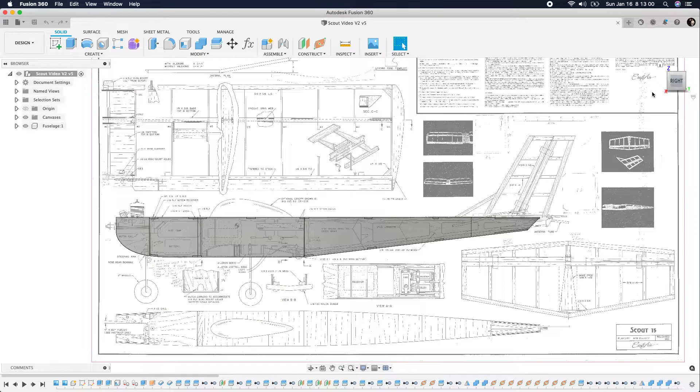I hope everybody is getting through the other stuff okay. Haven't heard too much from people.

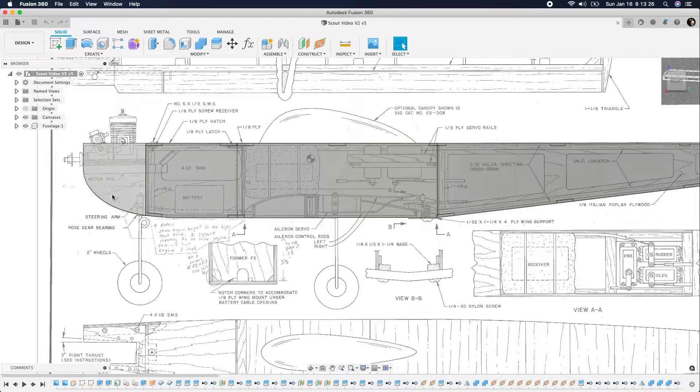But we're going to work on the formers today, and the formers are going to be pretty much like how we did the tops and the bottoms. This airplane has really simple straight up and down formers, which makes it easy. When you design airplanes, especially converting to electric, you might want to make sure you put some down thrust in that firewall. But we're going to just follow the plans here and move on along.

So this works very similar to how we did the tops and bottoms as far as creating the tabs. You don't have to create tabs on these. That's up to you, depending on how you want to build it.

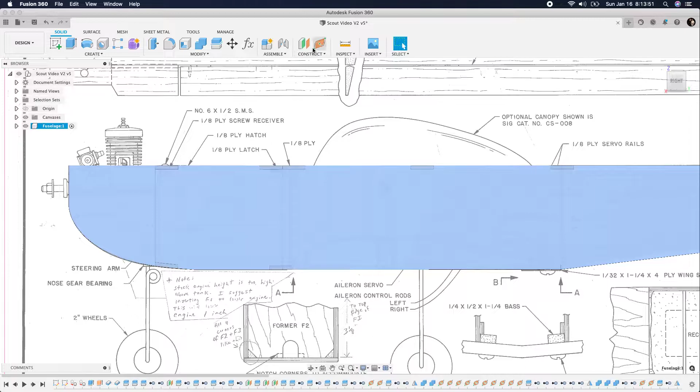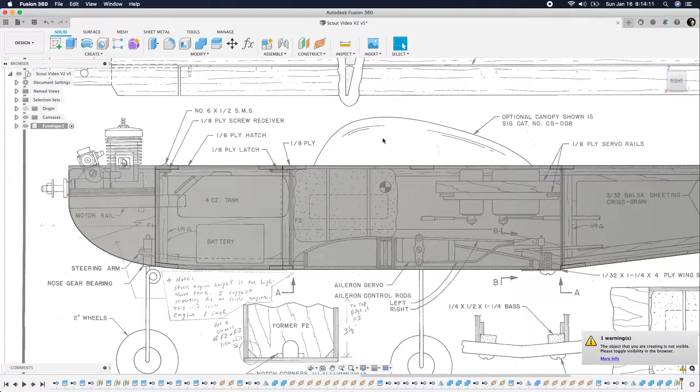So what I'm going to do is make sure I have the fuselage components selected, and I'm going to create offset planes. I'm going to select that plane, and I'm going to move these planes over to where these formers, or bulkheads as they call them in the ship world, start. And just as simple as that, we're going to repeat that offset. We can pull from the same one here.

Actually, I'm going to bring this one back a little bit.

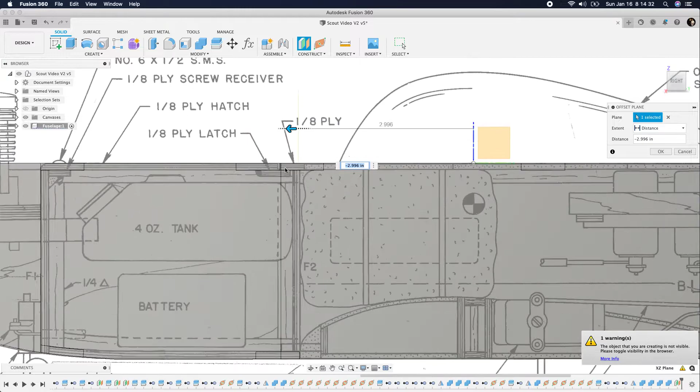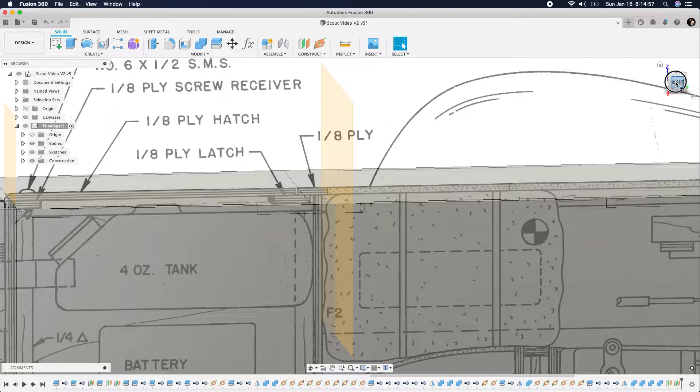Sometimes if you're not able to turn the construction folder on, if you're not able to see where that's lining up, you can make these planes bigger. If you grab an edge, you see where it turns blue. You can also grab a corner and make them bigger that way. It doesn't mean that that's only the area that you can draw in. With the plane, you can draw anywhere.

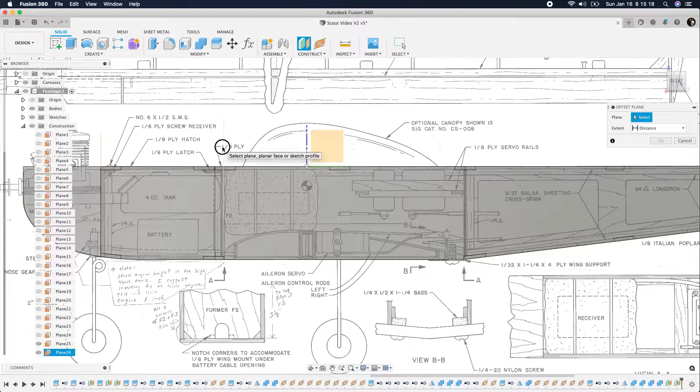I'm going to turn off all these other planes that we created the other day. Don't need them, just need these for the formers. And let's create another offset plane. I'm going to go ahead and pull from this one. It really doesn't matter because they're all running parallel to each other.

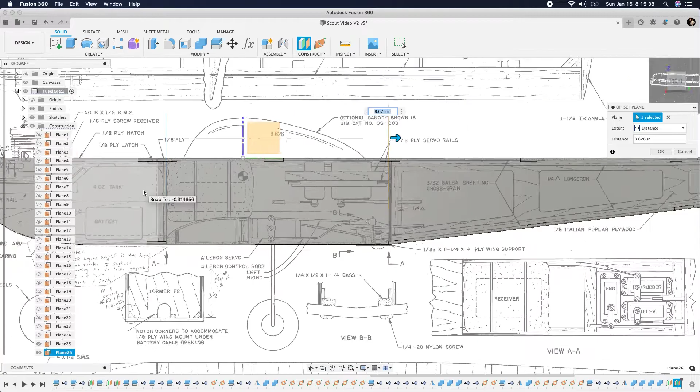And you just got to remember which way that the material is going to go. Like here, I'm going to go back. And on this one, I'm going to go forward with the material when I do this. Now, there are no formers back here, and with this type of construction, it's usually fine, because especially when you do tab lock construction or tab and slot construction, this locks in really nice, and you don't get any movement back there. So this is pretty good.

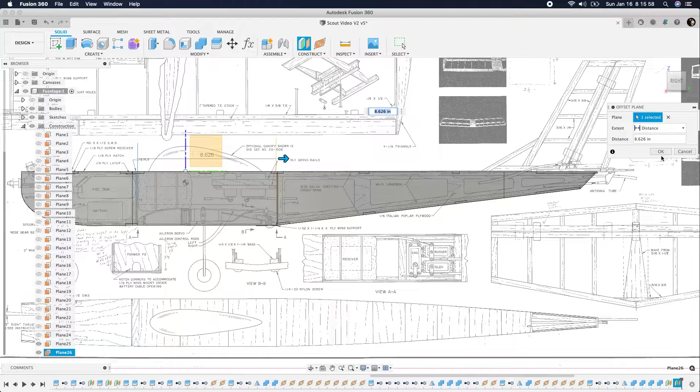We just have 3 formers here. All right, and let's go around here to this first one. Go home. There we go.

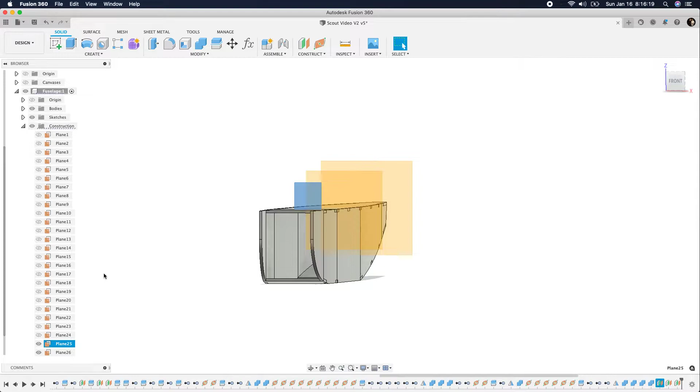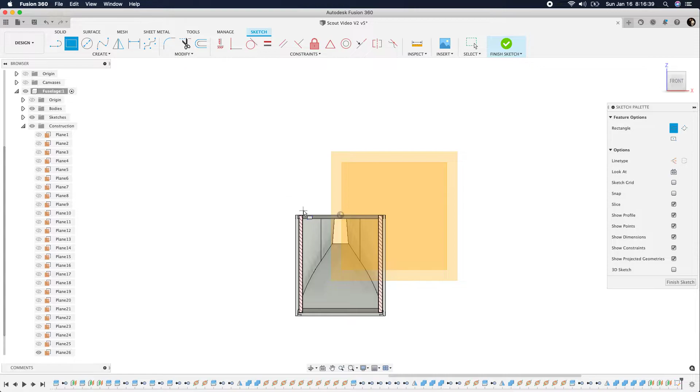I can turn off my canvases now. I don't need them. And I want to create this firewall. I'm going to start a sketch on the firewall. I'm also going to hit slice. And what slice does, slice will cut it where we have that plane. So it's pretty handy to have. And if you're doing tab slot, then all you really need to do is make a rectangle. Wait for my computer to catch up here. Make a rectangle bigger than the area, and we're going to dimension all that so it's fully defined. If you're just making a regular former, you can project all these lines and then just use that for your extrude. So now let's go ahead and define this.

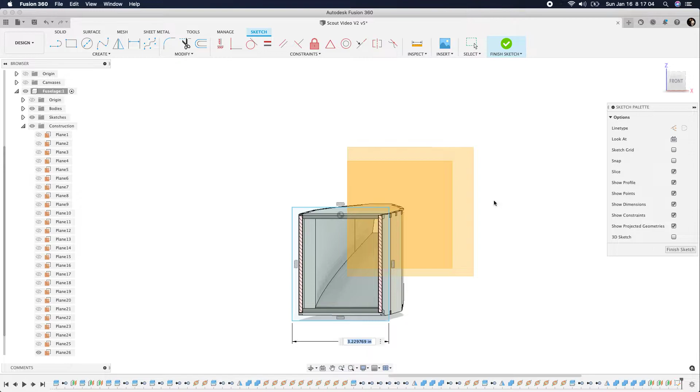Alrighty. I hope everybody that's up in the east is not getting hammered too bad with all that weather.

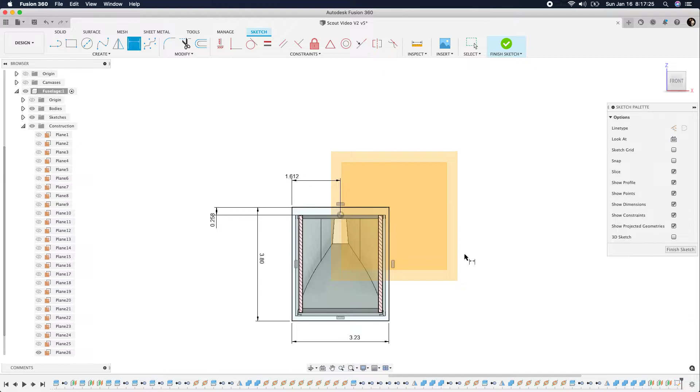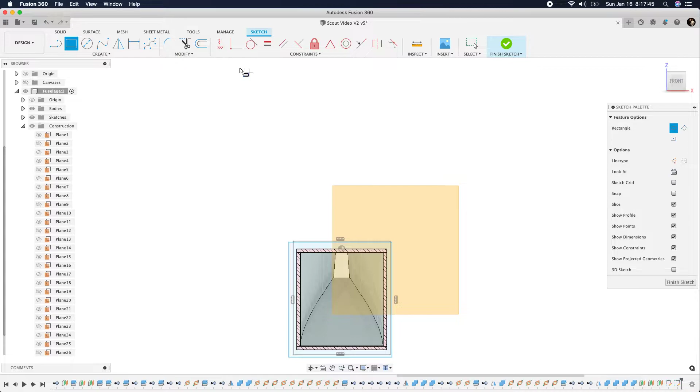Okay, so that one's good. We're going to finish that sketch. Let's go ahead and do the same thing here. I'm going to hit slice. And going to do the same thing. Just draw a rectangle bigger than what that size is right there. And I'm going to define that.

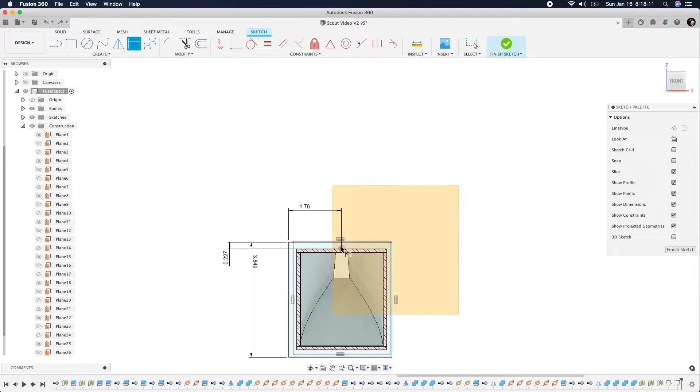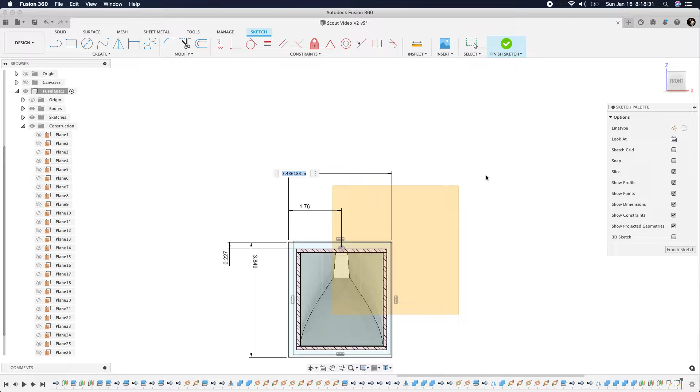Oops. Don't need that. Well, let's just make these parallel. It doesn't like that either. I bet it likes that. There we go. And we're going to do the same thing on this last plane. Slice it and just make a big rectangle. And define it.

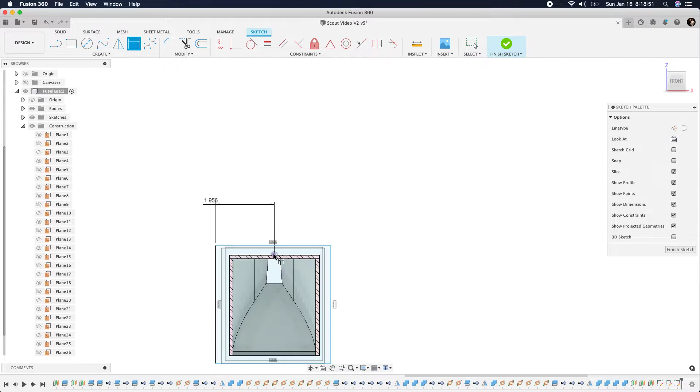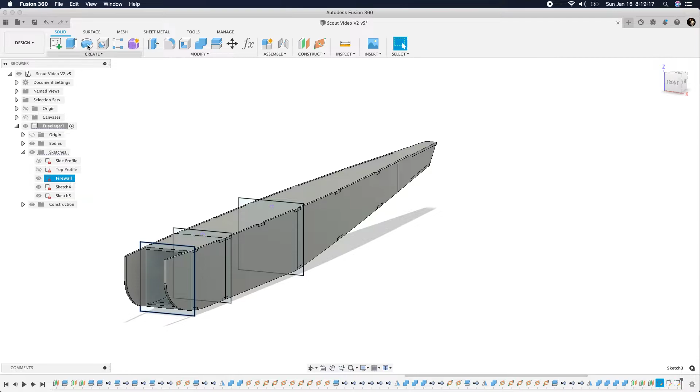And there we have it. Okay, so I'm going to come up on here, and I'm going to call this firewall. It may have another designation. Let's turn on the canvases and see what they're calling them. That's F1, F2, no, that's fine. I'm going to call that firewall, F2 and F3.

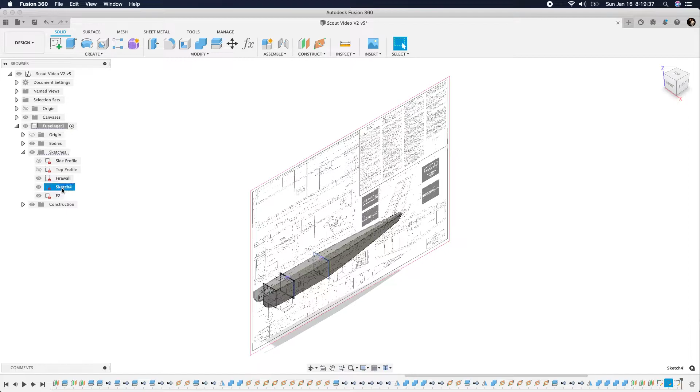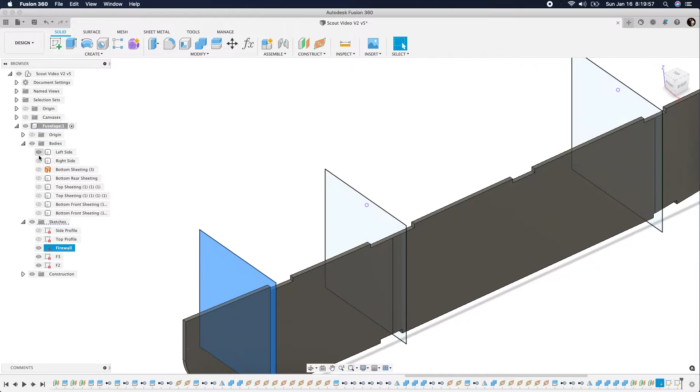There we go. All right, here we're going to extrude this one back. I'm going to go ahead and click that, and I'm going to turn off all these bodies here. Now I'm going to hit extrude, and I guess we'll cut this out of 1/8 inch.

3/16 might be a little better, but if you're electric, 1/8 inch is fine. We're going to call that good. And while we're here, we're going to go ahead and do these others. These will be 1/8 inch light ply.

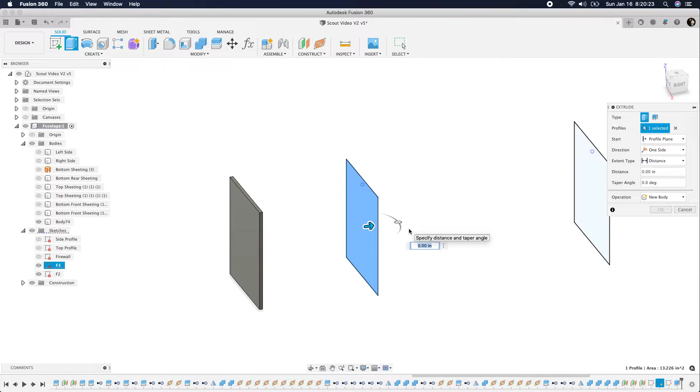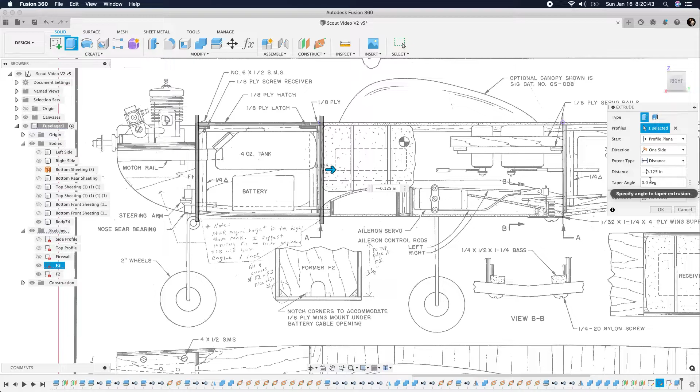And does this one go back or forward? Let's make sure. I think it goes forward. Yes, it goes the other way, so we're going to make this negative. Not double negative, that would be a positive. There we go.

And do this former right here. Now that's the one we want. 125. And there we have it.

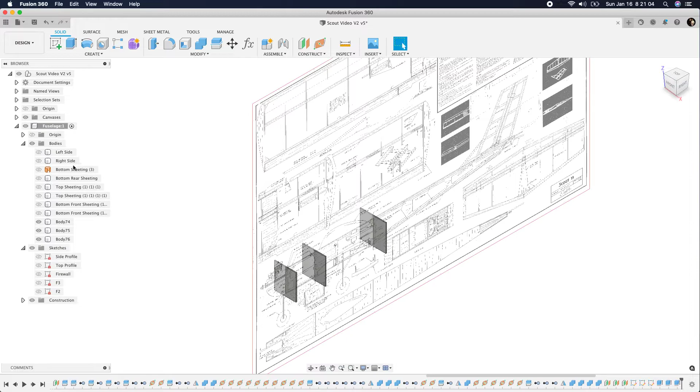Now we don't need the canvases, and we're going to go ahead and turn, let's just turn this top sheeting on. I'm going to rename this to hatch, that's probably more what that's going to be. Okay, and I want to...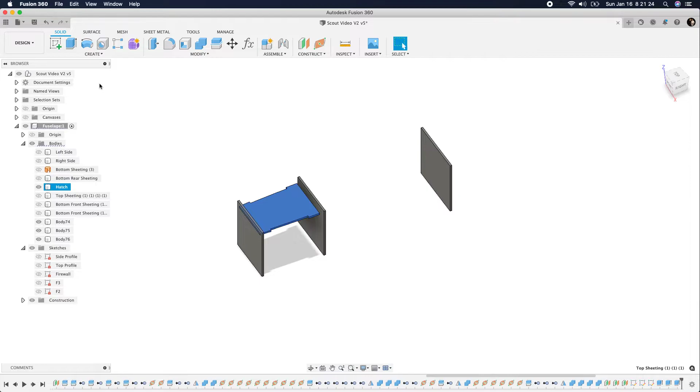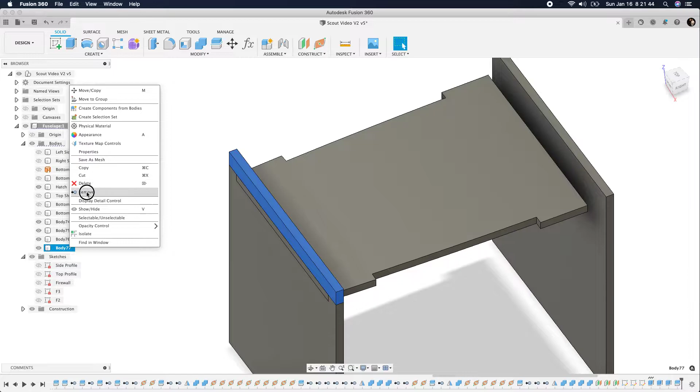Start splitting this up, so I'm going to go to split body. Select this as my target body, and we're going to select just this top surface to cut, and there we have it. This little bit we don't need, so I'm going to remove that, call that good, and then let's turn on the bottom front sheeting.

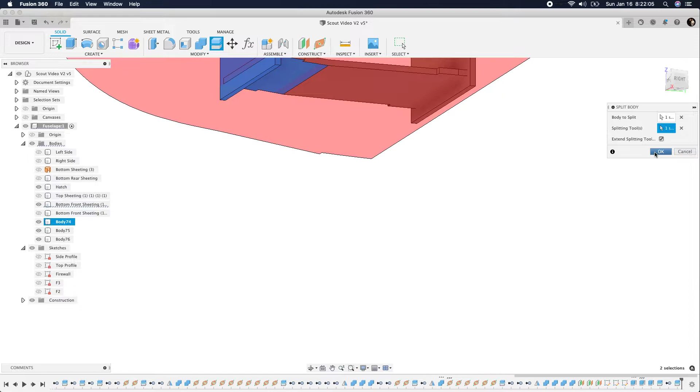There we go. And we're going to do the same thing with that piece. Split body. We want to split this body with this plane and call it good. We want to remove this. Okay.

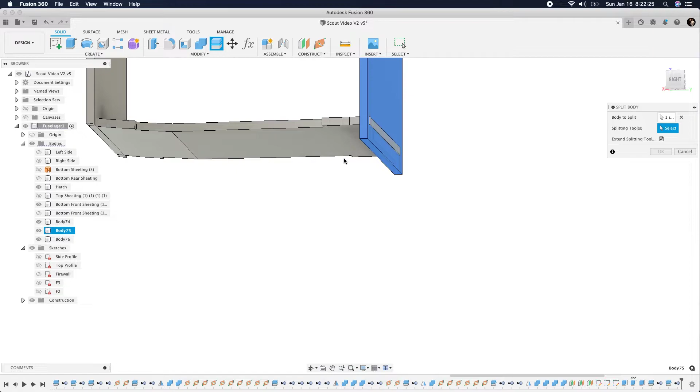And while we have this here, this one actually crosses the bottom of this former, so we'll do the same thing here. We just want that surface, we don't want the whole thing, because you want to make sure and cut through that entire piece.

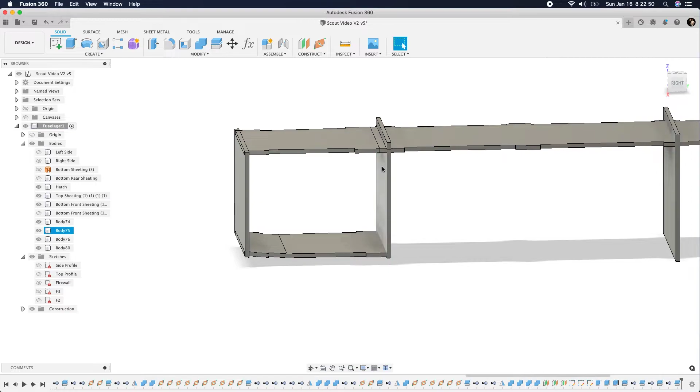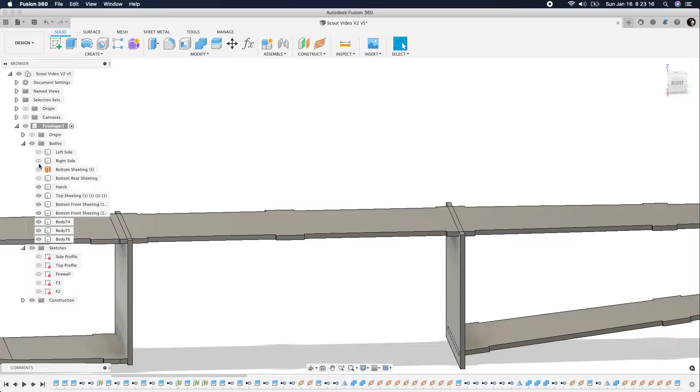All right, there's that. Now let's turn on this sheeting, and we're going to do the same thing here. There's a lot of rinse and repeat. Okay, let's get rid of this. And repeat here. Remove that. Now let's get the bottom of these.

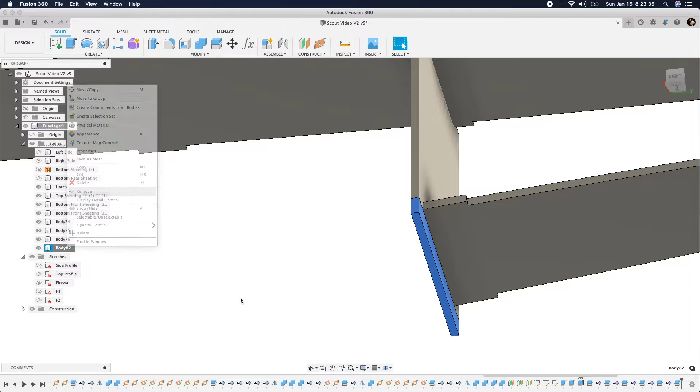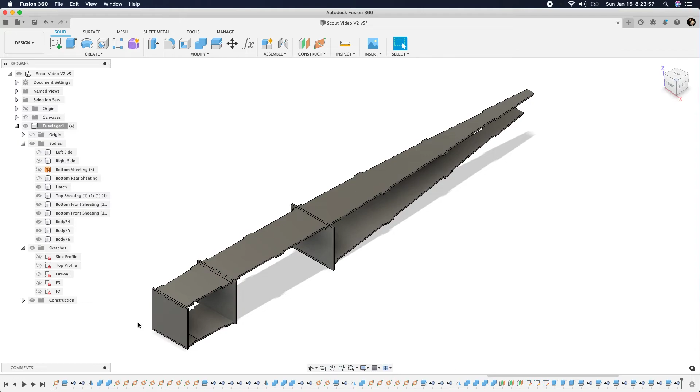So I've been experimenting with this program for a little while, trying to flatten out surfaces like these curved fuselage sides and other curved surfaces. I found a way to do some of that, and I actually ran to the laser cutter yesterday and cut some of that out, and it came out amazingly well. I am very pleased with how Fusion did that.

Okay, now we're going to do the sides the same way. Let me turn these top pieces off and leave those on. We can actually label these as well. Firewall, F2. And this one, F3.

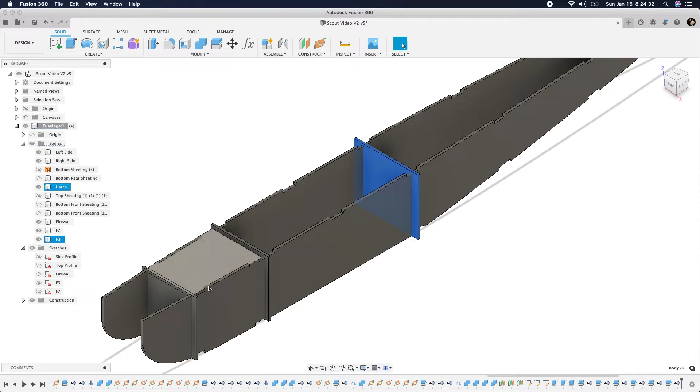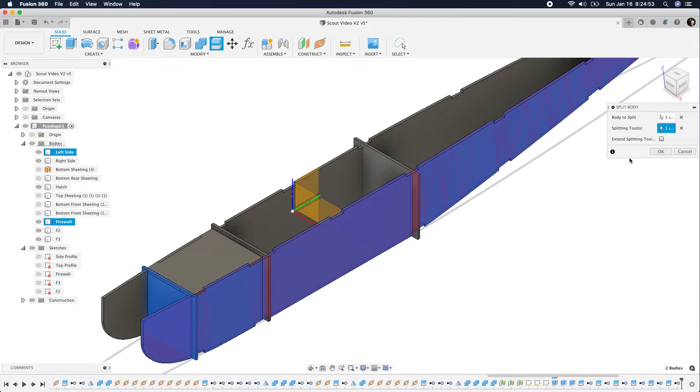Okay, so we're going to do real similar to split body here. I'm going to select it, and then for the splitting tool, I'm going to select. You see how it just selects faces? Well, sometimes if you click on an edge, now the whole thing is highlighted. I want to highlight the whole thing, and I'm going to show you why. So once I do that, now let's turn this side off.

You can see how it split this in several pieces. This is what I don't want. And now, oh, it was connected still somewhere. We'll have to work on that. Maybe that is not what I want. Let's see here.

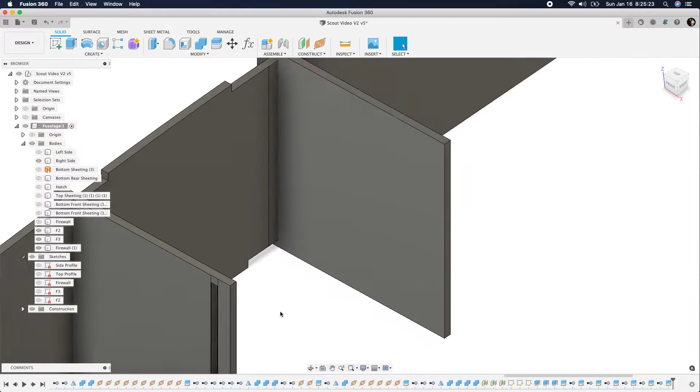Oh, it just cut that little strip out right there. All right, we're going to go back and do that differently. Yeah, split body, okay let's do the faces. Because of that notch where it's hitting, it didn't quite do like I wanted.

We want to split this, and we're going to split it with this face and call that good. All right, let's remove this. That's how we want it.

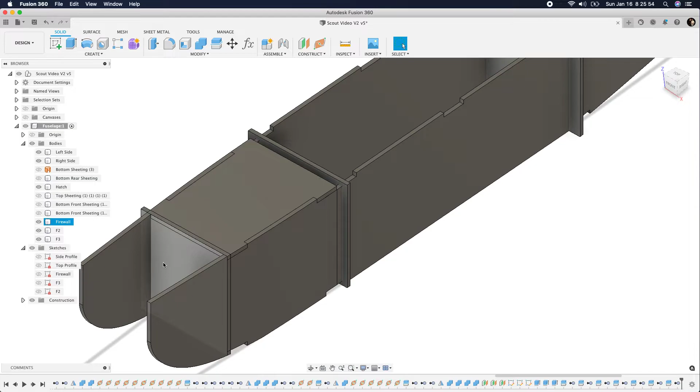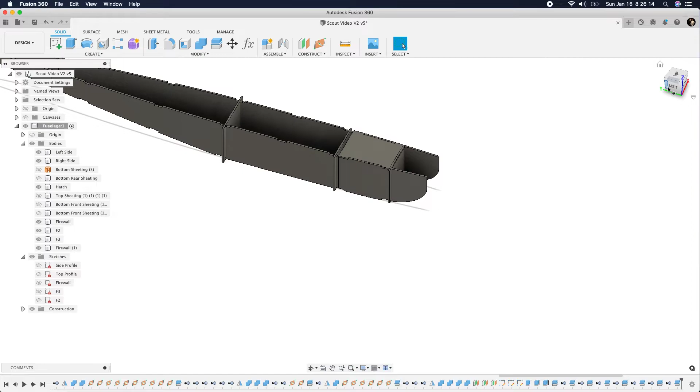Split body again, and come here on the inside of wherever I'm at. Nope. Split body. Select that face, hit OK. And now we should have the little strip that we want there. Yep, that's exactly what we want.

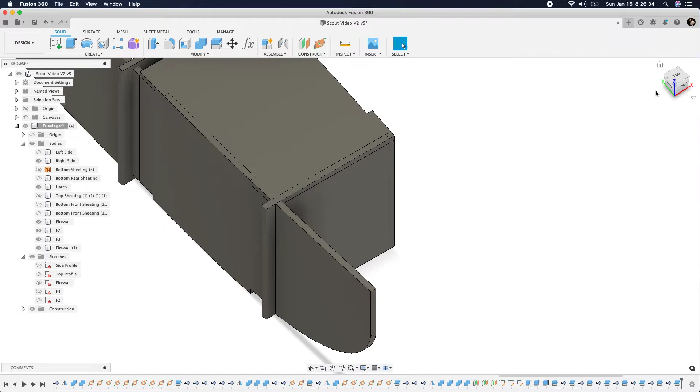Okay, now let's do the same thing on this side. Okay, split body. Come in here, like so. We're going to remove this piece. Okay.

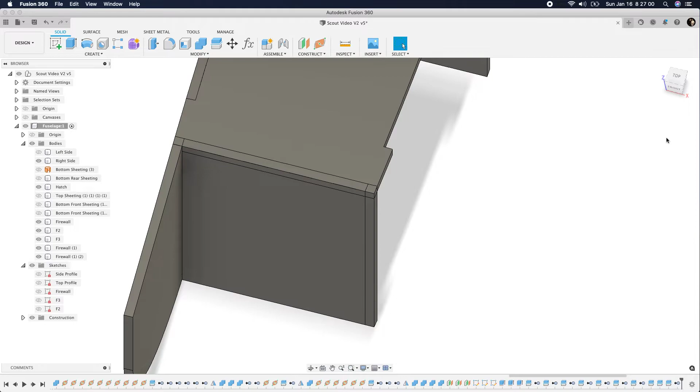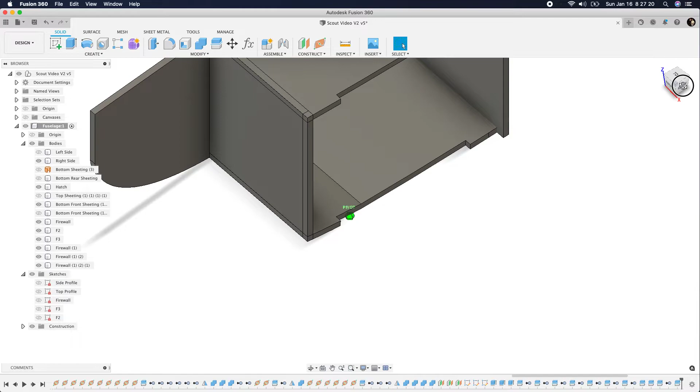And one thing I did forget to do was use the inside to split these pieces too. Split body again, and I want to use this inside face to cut there. And you can select multiple tools and multiple bodies to split. You just have to make sure that you're not going to split a body in the wrong side there.

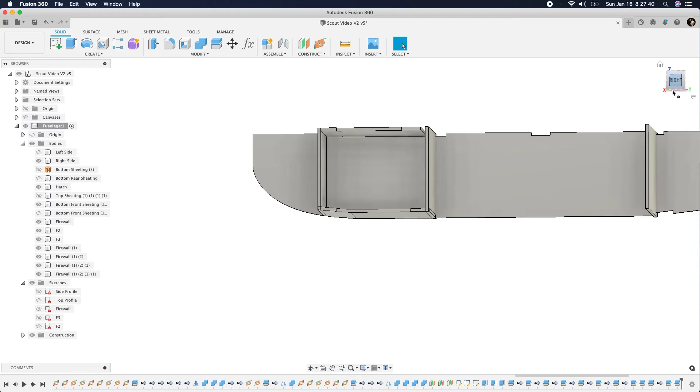And let's go split body again. We want to split this, and we want to split it with this tool. Okay, now I'm going to just show how to do this one, and then I'll do the others as an addendum.

One thing I like to do is create a couple of offset planes here in the middle for these formers. And I'm going to make the center tab to be 1/2 inch. So we're going to go 1/2 inch that way, or should be 1/4 inch, my bad. So I want the total width to be 1/2 inch. I need more coffee this morning. So that means I got to have 1/4 inch on each side.

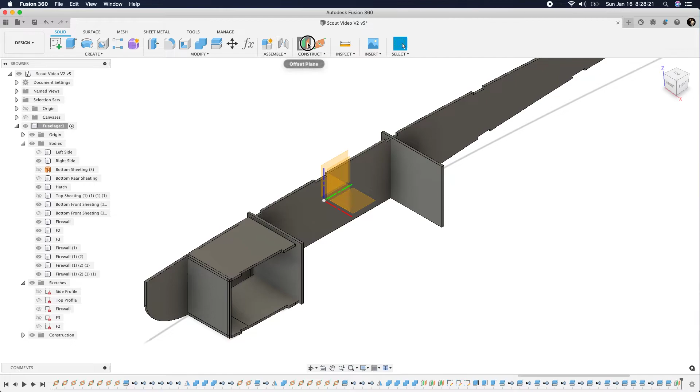There we go. Let's do the same thing on this side, 0.25. Now with these planes, let me turn the origin off.

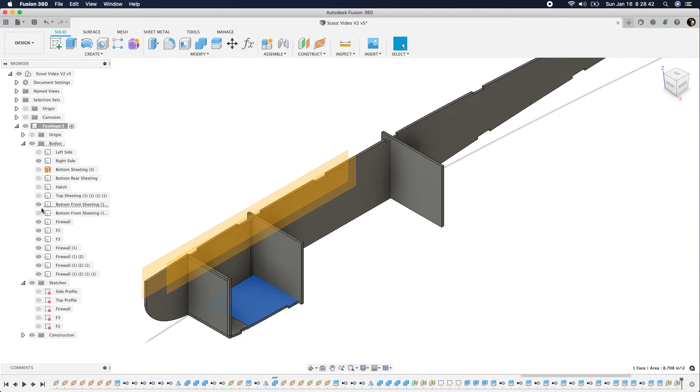This is what I'm going to create, the top and bottom tabs, and they're all the same, so you can do all these at the same time. Let's turn the hatch off and this bottom piece off. We can actually turn that off too.

So we're going to go back to split body. We want to split this one and this one. And the tools we want to use are this one and this one. Click OK. And we're going to remove that.

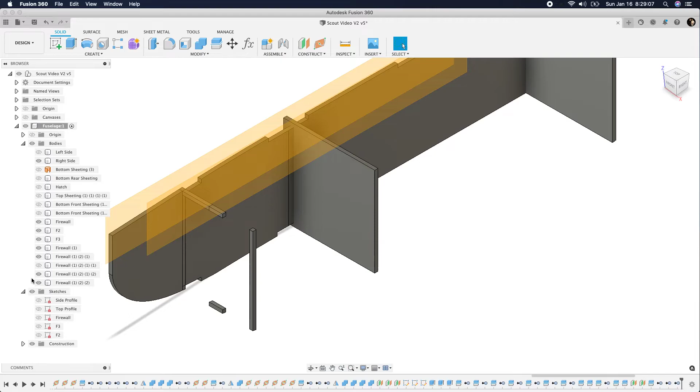Going to remove that. Going to remove that. Going to remove that. So we end up with this little bit. And then we are going to combine.

We want to go join, keep, do not keep tools. This is our target, and we're going to join these. And then we're going to do the same thing that we did. We're going to do this on the sides as well.

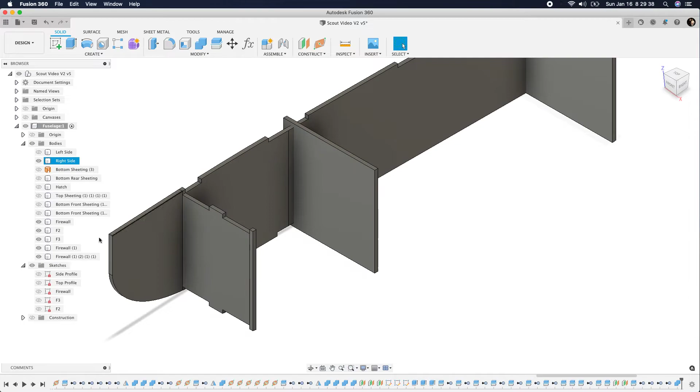And we're going to do the same as we did before when we put the tops and the bottoms and connect it to the fuselage. So if you go to the hatch here, I'm going to hit combine, but this time I'm changing my operation to cut. I want to keep tools. This is my target. This is my tool, and here we have it. We've got the notch where we need it.

So that's all basically the same thing we've been doing. So I'm going to finish this one up. Let me turn my alarm off.

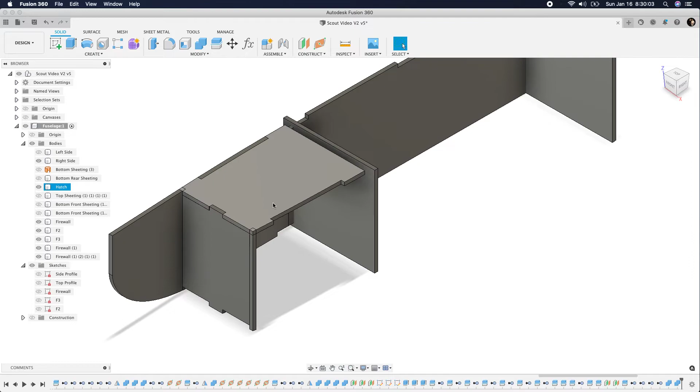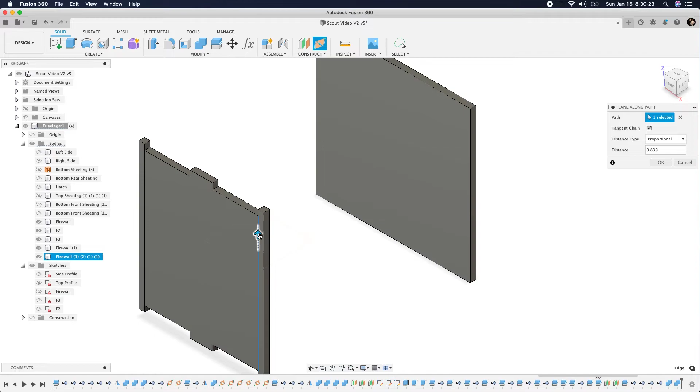Sorry about that. I'm going to finish this one up, and then you should be able to see how this goes. Let's come in here, and here I'm going to do plane along path like we did before. I'm going to select this path.

If I go, it should hit that point, which is where I want, because I don't want this top part. And I'm going to change this to physical, and that's 3.002. I want a 1/2 inch top and bottom tab here on the firewall.

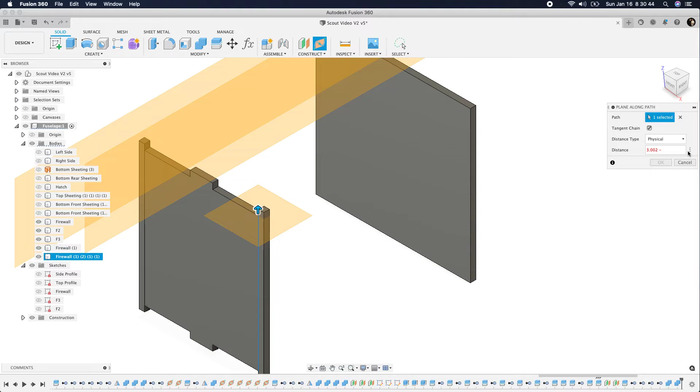So I'm going to go minus 0.5. That's going to bring me down to there. And I still want to cut this little top part off here, so I'm going to have to put a plane or something to cut that with right there.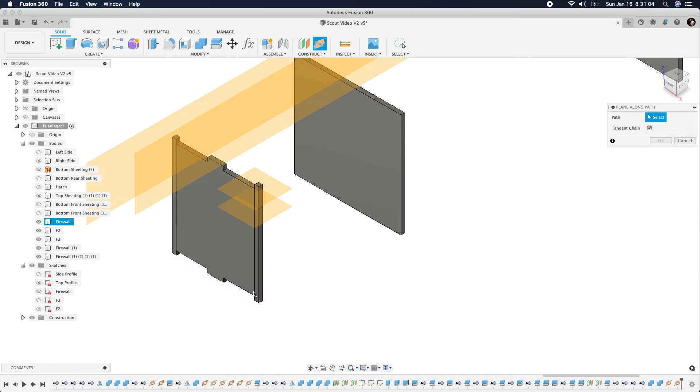So we're going to do that, and we're going to come back to this other side, the bottom. Do the same thing.

Now let's see here. Let's edit this one, because once there's one on a point, it doesn't want to. There we go, edit feature. And we're going to put this at

0.5. Actually, we have to go - I can't see my keyboard here because of my microphone. 0.127 plus. There we go. That gives me a 1/8 inch.

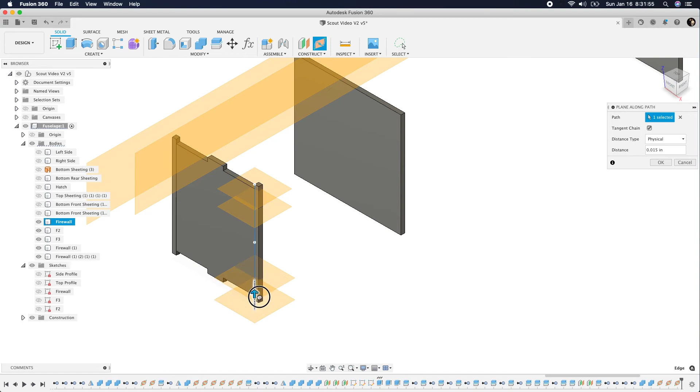And come back in here, hit it, go down to that point. I don't want the bottom. Yeah, that's where I want it, right there. Okay, nope, I want it on that point.

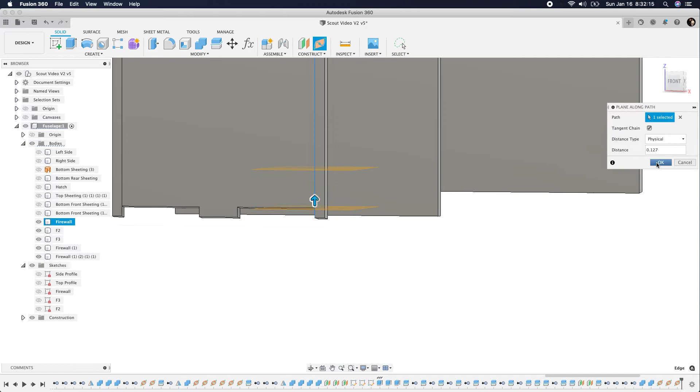Hit OK. Split body, split this body, and split it with these 4 planes we created. Hit OK. Get rid of the excess by removing. Do not use delete. Remove.

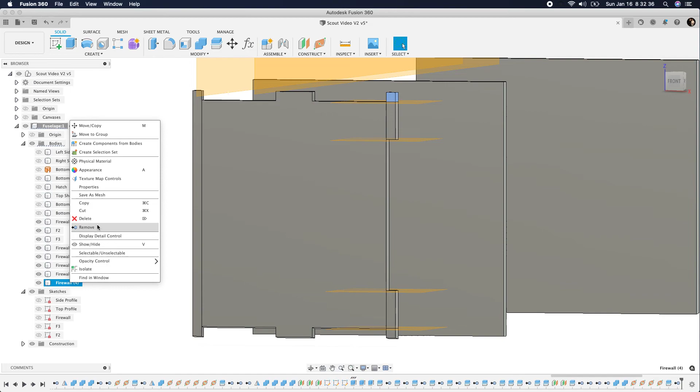Remove. And I'm going to try and mirror this, and we'll see how that works. I'm going to hit S to bring up my shortcuts. I'm going to select mirror.

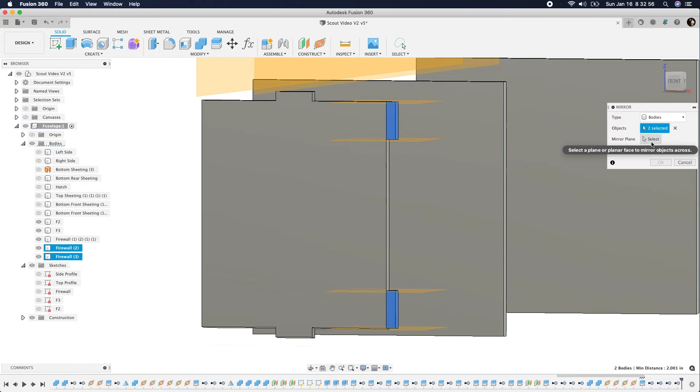We want to mirror bodies. And the mirror plane is going to be that center plane. Turn those off. Come up here. And let's see how lucky we get.

We want to join. And all those look good. You'll know you have a problem if you end up with a little line showing there, and that's when it's probably not going to work right.

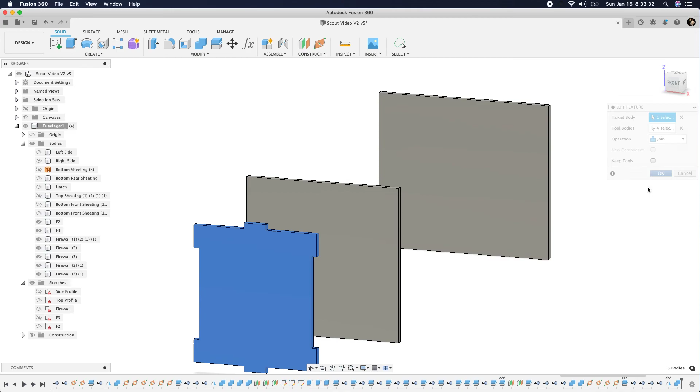And I accidentally hit keep tools. I don't want to keep tools. Edit feature, no keeping the tools. Now we don't have those lines there.

Okay, and then we're just going to combine and cut for our fuselage sides and bottom. We're going to go cut. This time we're keeping tools. This is our target body. This is our cutting tool. And select OK. You're going to repeat that.

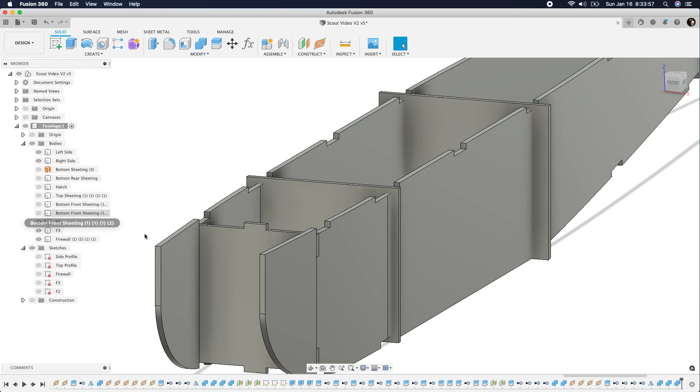Target body, tools, OK. And let's see if I've got that bottom front sheeting to do. Combine, that's what we want to combine. That's our tool, keep tools. OK. Now when we remove the firewall, you can see that we have notches through on every piece, just like we wanted.